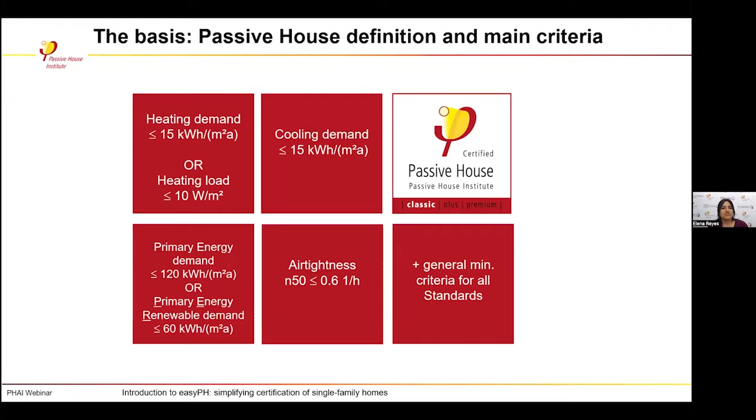So, the basis of everything that we do at PHI is the criteria that was set in the 1990s, and so the core definition has not changed. Whenever we talk about new approaches or new developments, we are actually thinking about two goals. The first one is to streamline certification, or in other words, make certification fast and easy. And the second one is to expand, to have more typologies designed and certified as Passive House.

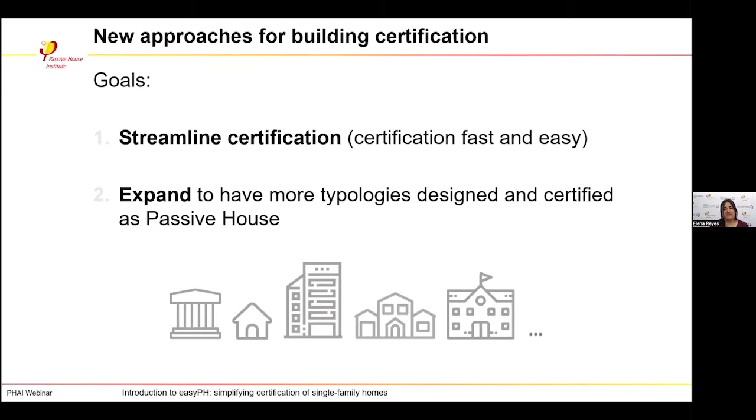That includes, for example, in later years, swimming pools, hospitals, and now we're talking about laboratories designed and certified as Passive House buildings. The topic of today is going back to the more common typology, which is single family homes, and it's called EasyPH, which is a tool based on PHPP. The hope and the aim is to make certification, and not only certification, but the planning of single family homes easier.

So the first part from my side is a few slides about the concept behind it and the general workflow that you need to use the tool. And the second part is the example that Shane will dive into so that you understand better, or take a closer look at the file itself.

So why focus on simplifying certification of single family homes? Well, as you probably already have experience with single family homes, we typically have smaller teams, so we also have smaller budgets. And at the same time, projects may be quite different one from another, right? So we have a lot of details that we have to check during certification, and this becomes challenging.

So even if teams are interested in building certification, that adds up to the budget and may become an important part of it. So the easier and the faster we can make the planning and the review, the more affordable we can make this option.

And let's not forget that in many places where we don't have passive houses yet, this is the first choice, right? People think, oh, I want to try passive house, I will start with a single family home. So the easier we make it for everyone, then the better and the faster we can have passive house all around the world. And then we have these projects which become exemplary projects and are the reference for other people to also do passive houses in these new regions or countries.

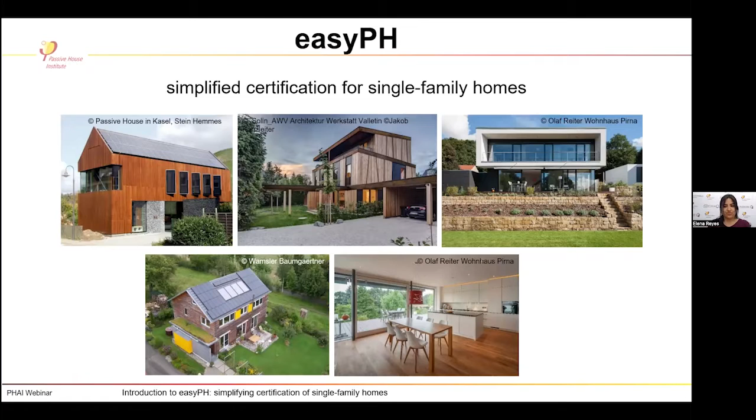So EasyPH is basically a modified version of PHPP, specifically the latest version of PHPP, which is 10.6. But we've managed to work on the assumptions that we need for single family homes so that we have simpler and way less inputs than we do in the normal PHPP. To give you an idea, instead of the 40 something worksheets that we have in the normal PHPP, we only need 8 input worksheets.

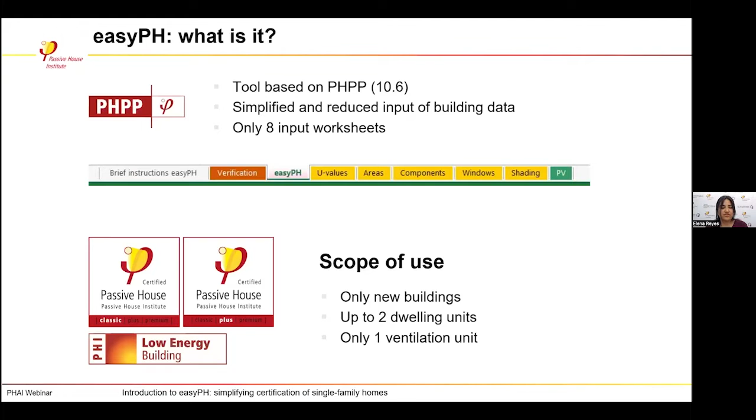The scope of the tool is at this first stage only for new builds, and you can actually calculate up to 2 dwelling units, but only if they share the same ventilation unit. So this is what the tool is aimed at at the moment, and we hope we can make some changes to, for example, also include retrofits, but we started with new buildings.

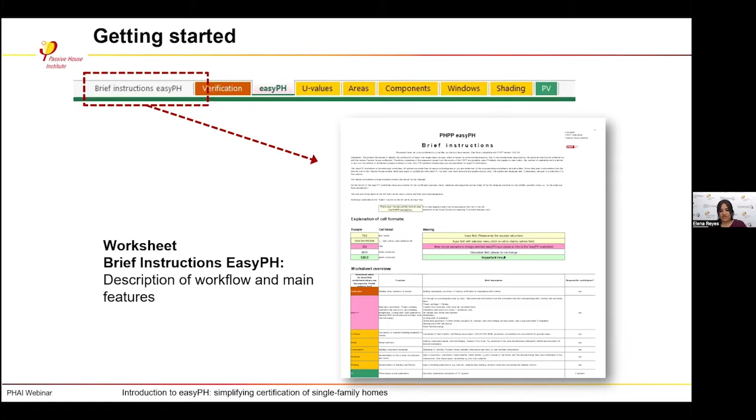So from these worksheets, we have, as we also do in PHPP, a worksheet called brief instructions. In this case, it's called brief instructions EasyPH, and that's just basically the best place that you can start with your calculation. It gives you an overview of the workflow, the different formats that we use in the worksheets, and then what information is expected from the project in each of the different worksheets.

EasyPH is also an additional worksheet here, and that becomes the main input worksheet. So that's where you have all the information that you need for the project, and then that information is linked to the original PHPP worksheets, which are actually in the background, but they're hidden because they cannot be changed in this case.

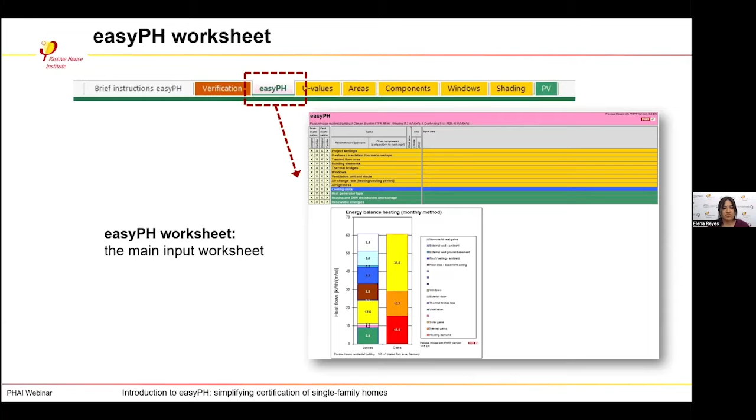As you will see with Shane afterwards, the EasyPH worksheet is structured in categories, and those categories are basically the ones we typically use for the planning and design of passive house projects. So based on the geometry, and then the ventilation systems, heating systems, and so on. So it should be, if you're familiar with PHPP, relatively easy for you to use EasyPH.

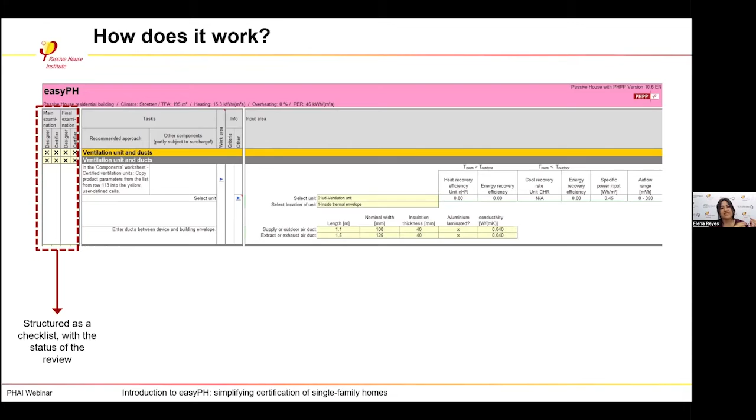So how does it work? If you look closer at the EasyPH worksheet, we start on the left with sort of a format that works as a checklist. This is intended so that the designer and the certifier have an easy overview of the status of the different categories and whether more information is needed, or if that category is complete and correct for certification. The next section is the description of the tasks.

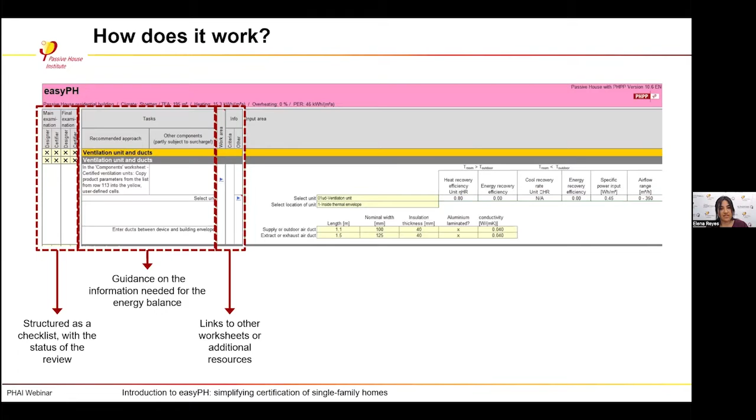So what is expected in this category, it's meant as guidance on the information you need to calculate the energy balance, and it's divided into two parts. One is the recommended approach, which will make planning and certification easier. There are other options given too, but these may need more time to carry out the model and for the certification review. Next, we have links either to worksheets still present in EasyPH, like windows or components, or to useful resources where you can get information needed to calculate the energy balance. The last section is the main one, where you input all the information about your project.

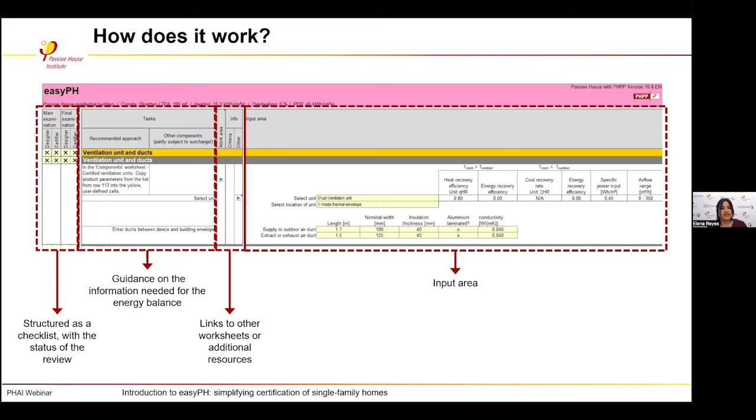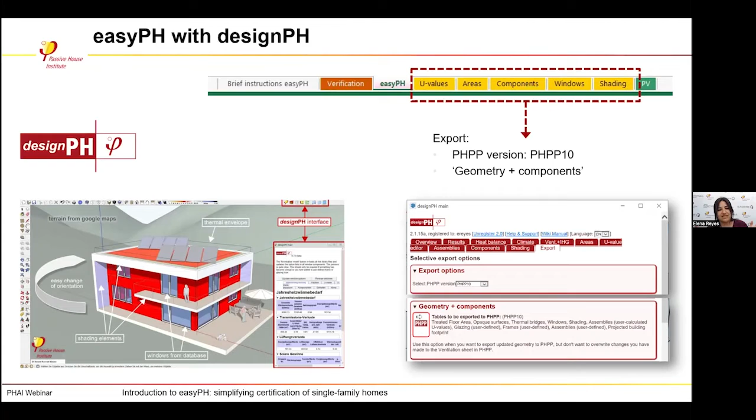EasyPH is also designed so you can use it with DesignPH. You can carry out your DesignPH model, enter all the information about your thermal envelope, and also calculate the shading. That, in my opinion, is the best approach, because it makes everything easier. If you use DesignPH, you've already completed 5 out of the 8 worksheets in EasyPH, and you're almost ready for certification. Just a small note: you have to export with the option geometry and components so that you don't overwrite any of the formulas on the hidden worksheets.

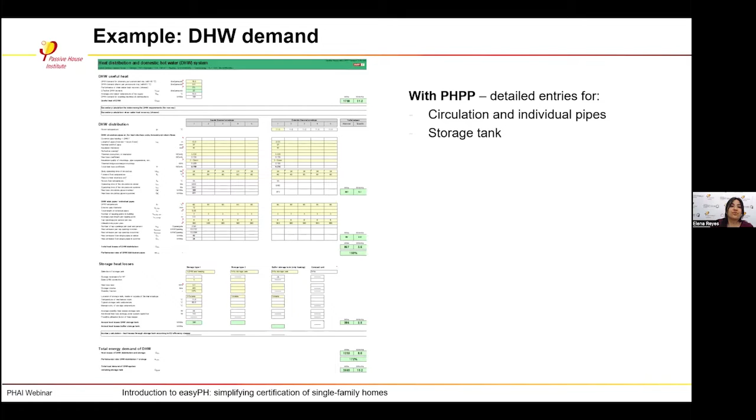To give you an example of the simplifications in the tool, I wanted to show the domestic hot water demand calculation. With PHPP you actually need a very detailed calculation, entering all the information from the circulation and individual pipes with exact measurements of all the different trajectories, plus detailed information about the storage tank. This is possible, but it's quite time consuming. So with EasyPH, we have very reduced entries for the pipes, just a few measurements here and there, and then we make an estimation of the losses based on the selected type of distribution.

If you say it's a compact distribution scheme, the assumptions are more positive, and if it's distributed throughout the whole house, the assumptions are a bit more negative. I think Shane will show you the example of the house he calculated for more clarity. Instead of having to submit all the different domestic hot water drawings with the measurements of each pipe and diameter, you just enter a few values, giving a general idea of how the system is distributed, not all the details.

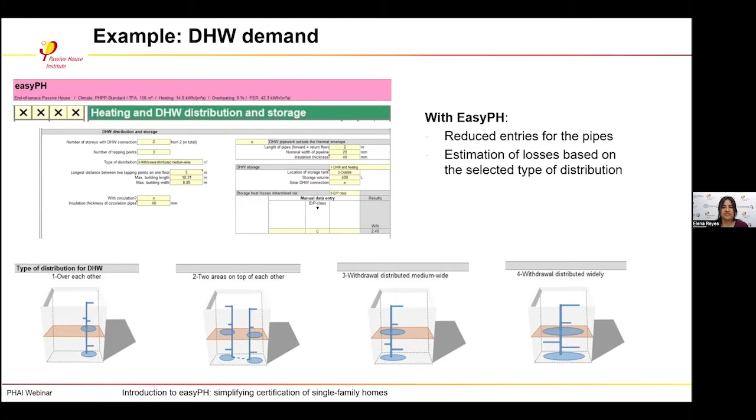In terms of guidance, I wanted to show an example for window installation situations. The recommended approach, which makes the calculation easier, is to start with inputting from DesignPH. Then for the actual values of the thermal bridges, you can either use similar installation situations from thermal bridge catalogs, or enter installation situations from component certificates if you're using certified components. What's implied here, though not an attribute of the tool itself, is that we start with good planning. The better our installation situations are, the more similar examples we can find in catalogs. If we have very specific details only for our house, it might be harder to find similar installation situations.

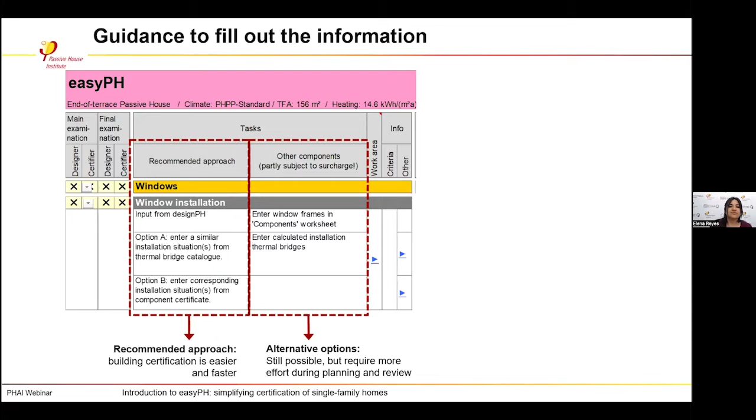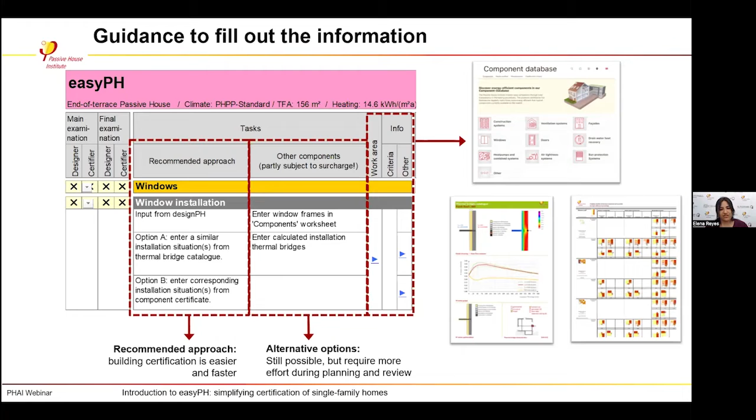Then we'd have to use the second option, calculating our own thermal bridges, which of course takes more time, both for the designer to get the values and for the certifier to review the project. In terms of the resources or links we include in this category, we have the link to the components worksheet so you can enter values, but also links to the component database where you can find examples of certified components, and other catalogs PHI has made available, covering different installation situations for building assemblies using concrete or wood. We hope these examples cover a large portion of typical installation situations, so you don't have to calculate thermal bridges for your specific project.

And then, of course, we still have the verification worksheet. The difference between the normal PHPP and EasyPH are these pink cells that you will see throughout the different worksheets. Those are the cells that are linked to the EasyPH worksheet, or that are fixed and cannot be changed, but same criteria, same verification method with specific values, everything again in the verification worksheet.

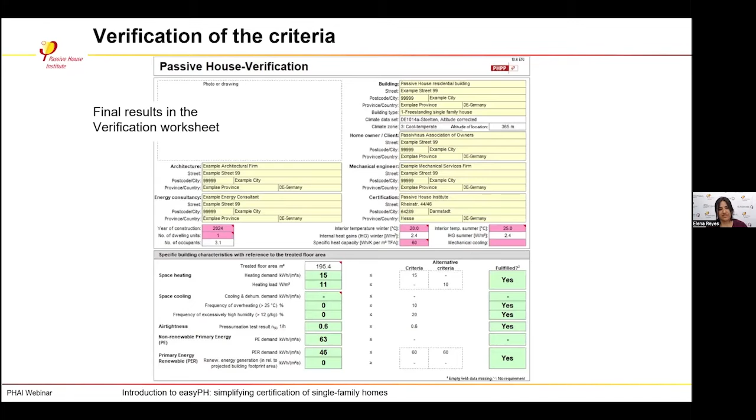So hopefully we have piqued your interest and you're wondering, how do you get EasyPH? EasyPH has been released together with PHPP 10.6, which was sent out to PHPP users in April this year. We've released this as a first step, as a beta version, but you can already use it for certification. All you have to do is notify your certifier that you want to use EasyPH. And please send us your feedback and comments so we can continue to improve the tool.

In case you want to share this information, there is a small, quick description of what EasyPH is on our website. You find it under PHPP, and then EasyPH. And in case you're curious about other developments from PHI in terms of building certification, I also invite you to go to our site where we have the energy standards and criteria. At the bottom, we have a section called Criteria Under Development, where we describe a few new approaches that we are testing. If you're interested, just contact us or an accredited building certifier for more information.

And with that, I would let Shane show you how the tool works and how he filled it out for the project that he used as an example.

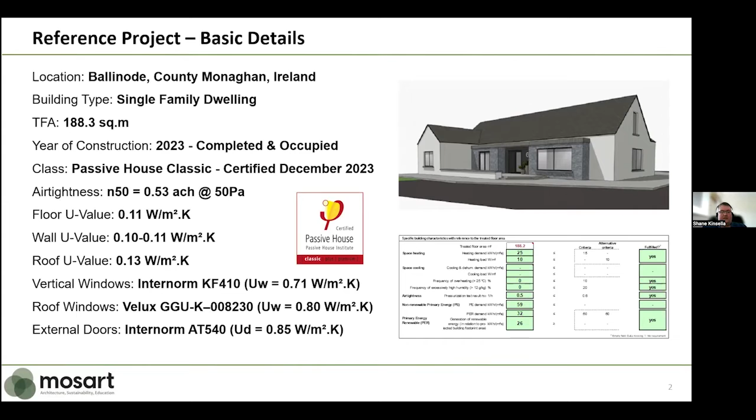So that's the house we'll be using as our reference dwelling. I've just set out briefly here some of the key characteristics of the house. The house achieved an N50 of 0.53 air changes per hour. We have U values in the range of 0.1 to 0.13. All the vertical windows and external doors were provided by Internorm - alu-clad windows with triple glazed units throughout. So the design is quite good on that front, and you can see the U values are pretty decent. We also have some Velux roof windows in the rear of the house - I think they have 5 panes of glass, a triple glazed unit with an outer double glazed unit on top of that. So it's quite a hefty unit, a certified system from Velux, which gives a really good performance.

So that's the key stuff. On the ventilation side, there's a Renson MVHR system installed. Flow rates were calculated both in accordance with TGD Part F, the regulation for Ireland, as well as Passive House, and it was found that the TGD Part F values were a little bit higher than Passive House. So that was the basis of the design.

The MVHR system had an efficiency of 84%, and when we calculated it in PHPP, including the fresh air and exhaust ducts, it actually came back at 82.3% effective heat recovery. You can just barely see in the first picture that the exit point for the fresh air and exhaust is very, very short, and you can see the detail where those ducts went out through the external wall of the house. Barry had placed it very close to the external wall, so that run was minimized, hence the effective heat recovery was very high.

We would sometimes see that value a lot lower. So the electrical efficiency of the system is given there, and it was a 160 millimeter EPS duct system that had a 16 mil wall at 0.03 on thermal conductivity. Then within the dwelling, there was a radial system to distribute supply and take back the extract back to the unit. So that's the ventilation approach.

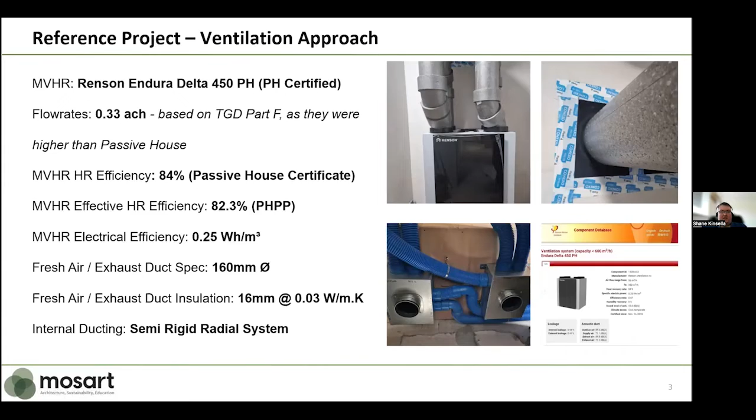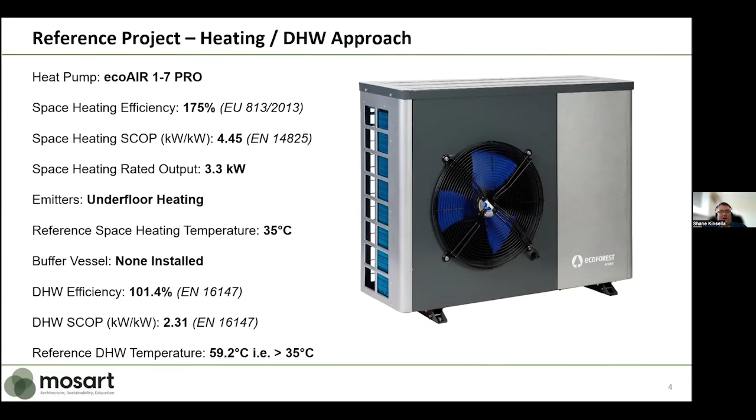Then on the heating front, Barry installed an EcoAir air-to-water heat pump. I provided some values here from the performance of that heat pump on screen. You can see it has a pretty decent SCOP when it's doing space heating, that's at 35 degrees, as there is underfloor heating throughout the house. We can also see that domestic hot water efficiency is pretty decent there, with a 2.31 on the SCOP for generating domestic hot water. So overall, the heat pump was a nice fit for the house. It delivers 3.3 kilowatts of space heating, which is more than enough for the house. The house had a load of approximately 2 kilowatts, so it was a nice size, and I think Barry has expressed that he's quite happy with the performance of it to date.

We also had a dual domestic hot water cylinder, a 500-litre cylinder. That might seem quite a large cylinder for a dwelling, but bearing in mind a family with lots of hot water demand in the house, 500 litres is often justified. So that's a dual 500-litre cylinder, and the heat loss was given from that provided by Joule, and that tank has an energy label rated as C.

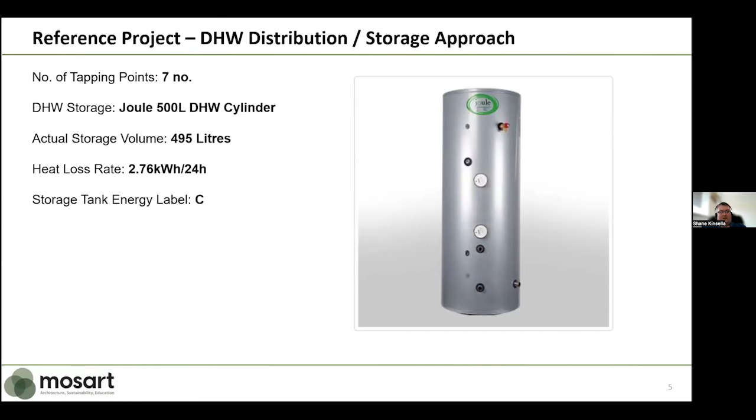So those are the basic details that we used in our inputs into the EasyPH. I'll move on to the EasyPH now. We'll take a quick look through it, and bearing in mind today time is limited, so I'll try to keep the presentation as short as possible. We won't be going into massive detail here, but as Caroline said, there'll be further webinars on individual sections.

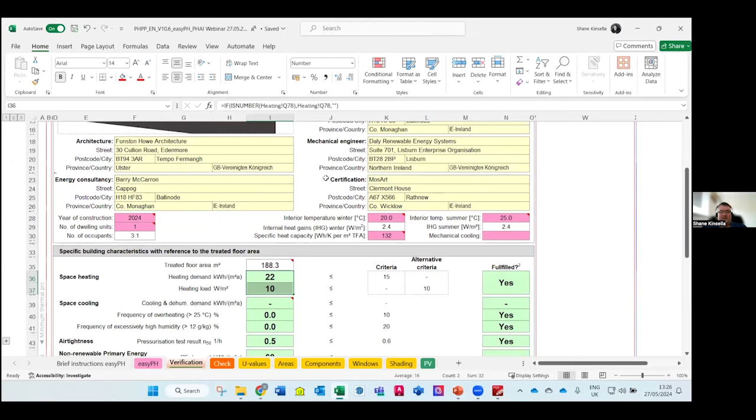So we can see here that the house, when modelled in EasyPH, would actually comply with Passive House Classic. We can see it's hitting the 10 watts per meter squared there, which, when we go to decimal points, is a little bit more conservative using EasyPH, in the order of about 0.3 watts per meter squared. So there's a very small penalty built in there, which I think is fair for the reduced paperwork burden. The house would still be fully certifiable.

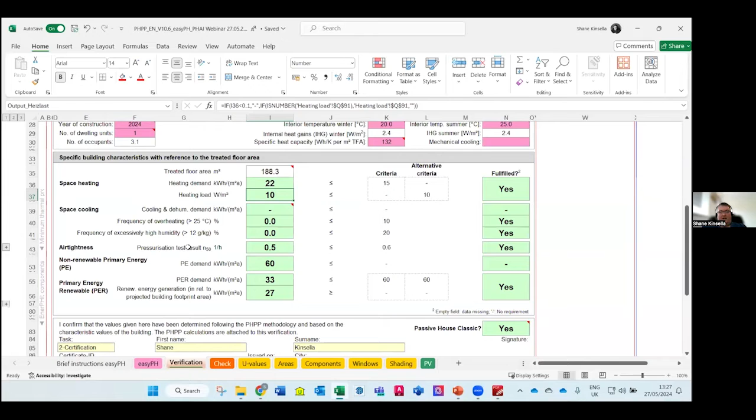So that's the verification tab. As Elena said, there are 8 tabs fundamentally in EasyPH that we need to fill out. Within the brief description tab, there's plenty of information about what we must provide, like in the verification tab - building description, summary results, etc. Nothing really unusual there. Within the EasyPH tab, the vast majority of the design information, particularly on the MEP side - ventilation, heating, domestic hot water, cooling, anything like that - nearly all goes in on the EasyPH page.

Within your other tabs, your U values are very same as traditional PHPP modeling - you put in your build-ups, correction factors, all that good stuff goes in there. Nothing unusual there for most PHPP practitioners. On the areas tab, again, very similar to what you'll see in a standard PHPP - your areas will all come in, your thermal bridges, all that good stuff. The calculation of treated floor area is done in the EasyPH tab, so we'll take a quick look at that now. That's probably the big difference.

A lot of people will calculate their TFAs in DesignPH, but your DesignPH must be based on geometry and components only. You don't pull anything else out from DesignPH. Your treated floor area must be calculated in PHPP instead, and there's a good reason for that. We'll take a quick look at that in a moment.

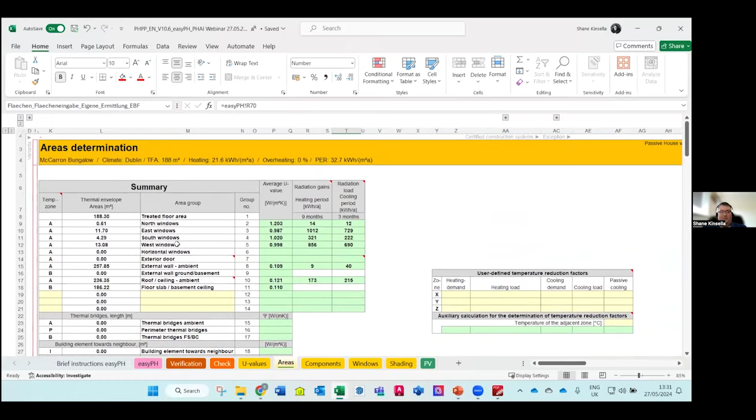Same on the areas tab - it should be familiar to most people. The summary up the top will be pretty familiar to most practitioners. Again, you'll see nothing terribly different here. Probably the one thing you've got to do is cross-link your TFA across from your PHPP tab. All you simply do is put an equals in and cross-link it to that output, or you can type it in manually. I would tend to cross-link it, but manual input is fine as well.

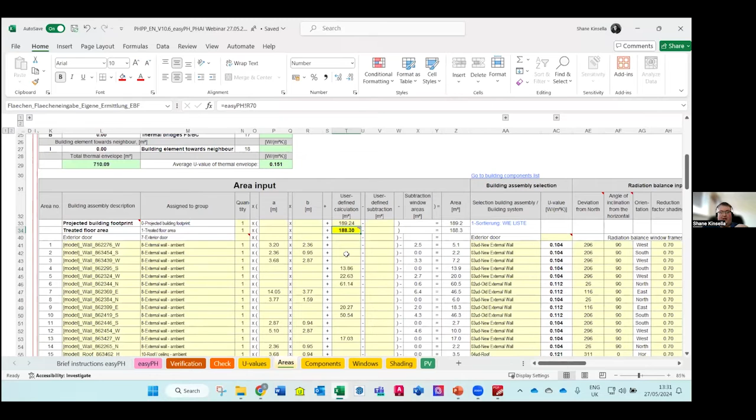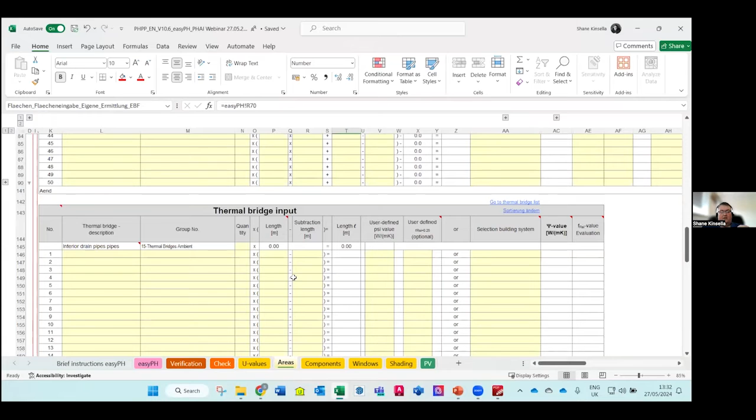The areas tab again is all fairly standard, nothing really out of the ordinary there. Thermal bridge tab, where relevant, you fill that out. If you're not doing a thermal bridge free design, you'll put in your thermal bridges, all that. So nothing really unfamiliar there.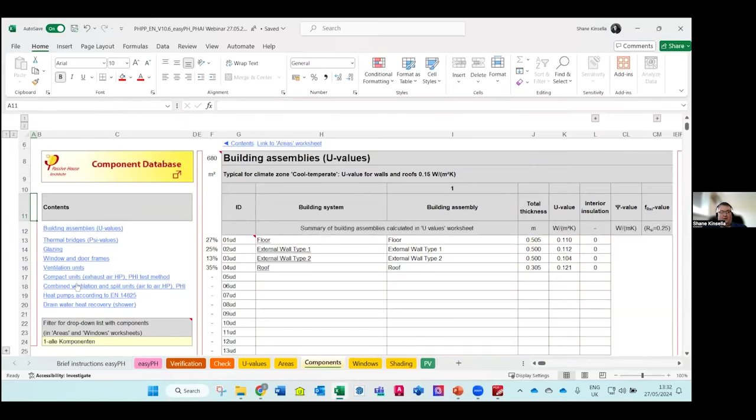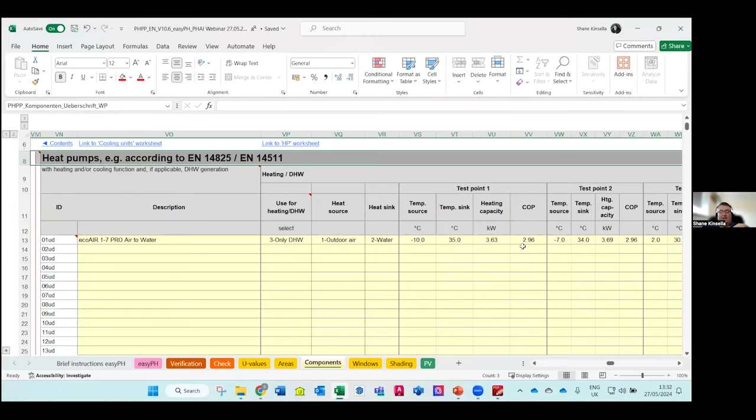Again, when we go to the components tab, it will all seem fairly familiar to most practitioners. You put your glazing types in, your window frame types in, all that good stuff goes in. We can then put in our heat pump inputs if we're doing a detailed heat pump calculation. There is a simplified approach, which I'll show you, which will cover most projects, but where you want a more detailed result, or maybe you're struggling a little on the PER, you can look at the detailed approach. It should again be relatively familiar to most people.

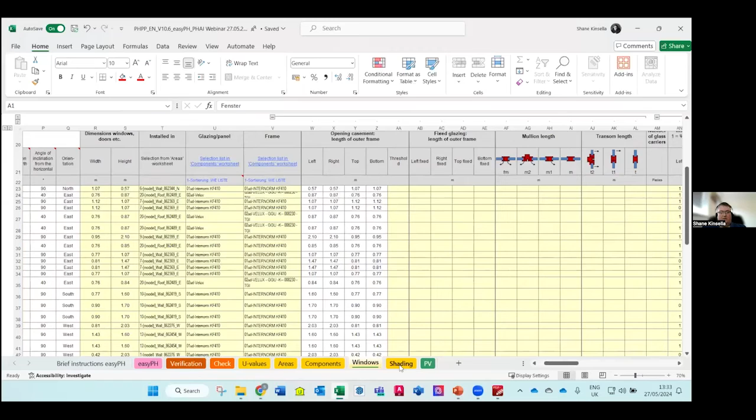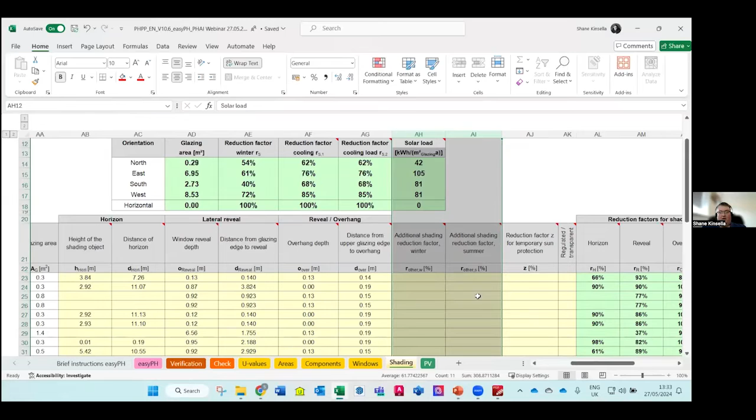Windows and shading is all fairly standard. You put in your window frame details - most of it will come from DesignPH. Where you've transoms, mullions, etc., you can pull all that information in, assign all your installation thermal bridges, etc. Again, all fairly standard stuff. Same with shading - in this case the shading was calculated manually for this project, but where you have a DesignPH model, these tabs will be automatically filled in for your reduction factors. So again, it should all feel fairly native for most practitioners.

And last but not least is our PV tab - again, same as a standard PHPP. You put in all your information from your data sheets, etc.

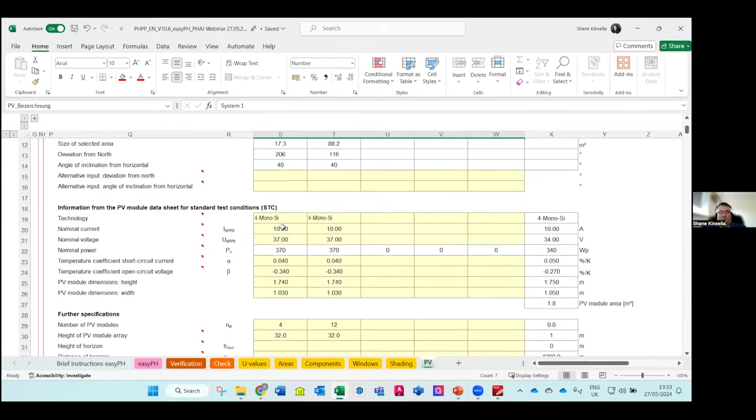Put in how many modules you have, all that good stuff. Put in the efficiency of your inverter, etc. And then PHPP will do the rest and calculate how much electricity the PV is generating, and then work out any PER allowances, or if you're working towards plus.

You can certify to plus in EasyPH. It's important to note you cannot certify to premium. If you're deciding to go passive house premium, it's not possible, certainly at this time, to certify a passive house premium dwelling using the EasyPH approach. You must go the full PHPP road. So anyone advising clients, just be aware of that. For classic or plus, very easy. Premium, not happening. It's not currently on the table.

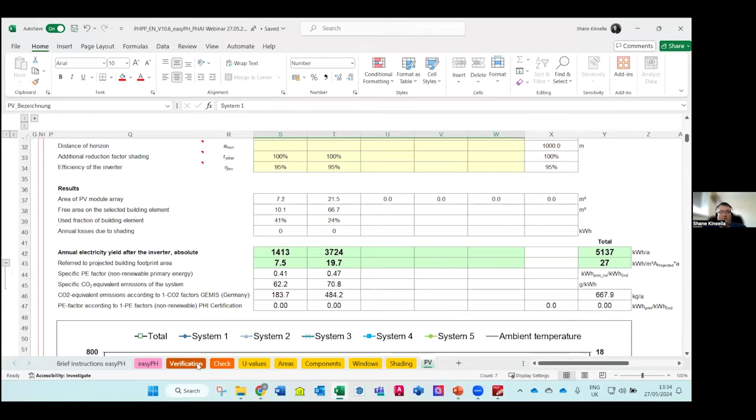So that's, I suppose, the key tabs that have to be filled out. I think most people will find they're all fairly intuitive for most practitioners. Again, your verification tab will seem fairly native for most people. There's a set of tabs on the right hand side that are typically filled out in a traditional PHPP. They're actually hidden away here — you don't need to fill those out. They're all done on the EasyPH page.

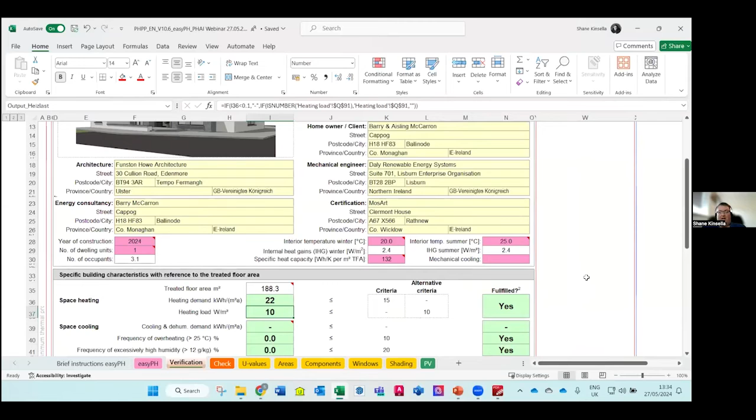So that's just a very brief overview of the inputs. When we get into the EasyPH page, we start at the top and work down through the various sections. As Elaine said, there are various sections — one where the designer and certifier can tick off work as it's completed and accepted by the certifier, and those little X's get filled out. That's a very simple approach. There's a recommended approach and an alternative approach listed in the tasks, nothing too complicated — most people can read it and just work through it.

So we fill out our first tab, which is project settings. We fill out the key bits — we're going for passive house. We can certify a passive house or PHI low energy building at the moment. It's not currently used for EnerPHit — that's not on the agenda. We can also certify for classic or plus, but we can't certify for premium.

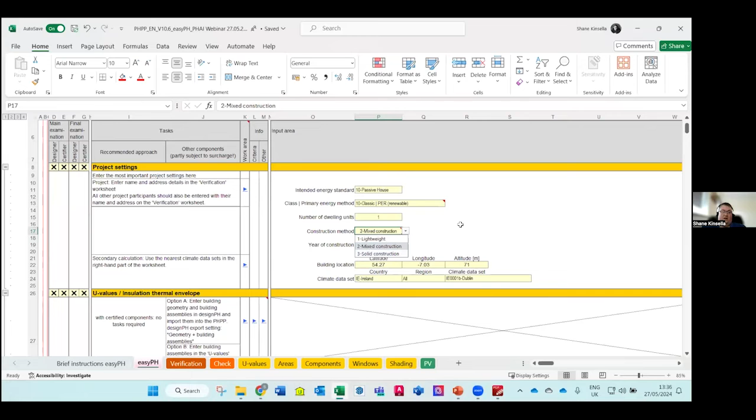We can put the number of dwelling units in as 1 or 2. We can put the construction type here, which is used for calculating your thermal mass — lightweight, mixed, or solid. In this case it's mixed because we have a mixture of timber and concrete.

The year of construction can be entered. You can also enter your building location and altitude, etc. Pick your weather file — it's important to note the weather file must be a PHI approved weather file in the main PHI directory. If you're using non-standard weather files, you can't use EasyPH; that's not permitted. There's also a secondary calculation to the side when you put your location in that allows you to pick alternative weather files and optimize which one might be suitable for your location. In this case, we've used Dublin, the original weather file used for certifying the building, so we've stuck with Dublin for this example.

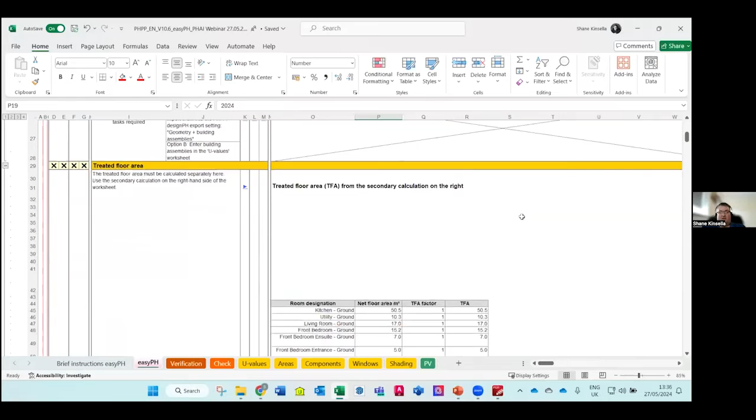But then we get into TFA and — sorry, I missed the U-value section here. The U-value section is calculated as normal in the U-values tab, and that pulls that information in automatically. So there's nothing to fill out here, no inputs needed at this point — it's all done from your U-value tab.

So then you get into the TFA tab. This tab is a requirement that must be filled out. We must enter the information here, and this will calculate both the TFA, Vn50, and the ventilation calculations all in one sweep. We can put the number of floors — ground, first, second, whatever — however many floors are in the house. There is no TFA limit and no limit on the number of floors that can be certified using EasyPH. The criteria is based on number of dwellings and ventilation systems — you can only have one ventilation system.

So you could conceivably have a 4-story, 5-story dwelling, perfectly fine, no issue. If it is a single ventilation system, it can be certified with EasyPH.

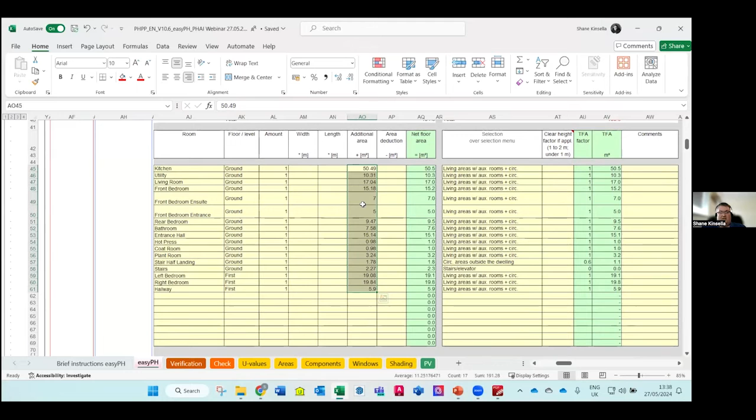Within this, we've itemized all the room areas here. So we've put in all the areas of the room, excluding internal walls etc., following the standard PHPP measurement approach as per the manual. We can then assign the rooms from the drop down list, and put in whatever type of spaces we're working with.

Most areas will be living areas. You can put in your stairs or elevators, etc. Any circulation areas outside the dwelling, or half landings or stuff like that, can go in as well. The tool will do everything else automatically for you once you itemize that in.

We can then work out our VN50. We put in our average room height. I've been a little creative here in that I've just taken 2.7 as a standard value. In reality the values are a little different in this house, but for the purposes of the example, I've just assumed all floor to ceiling heights are 2.7.

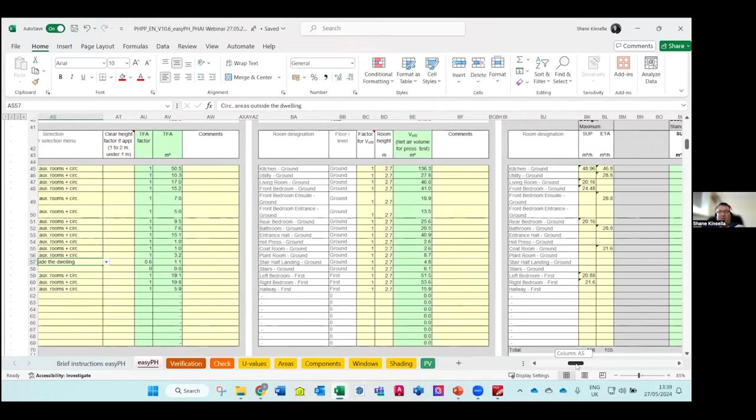Then we can go into the ventilation section and calculate our ventilation flow rates. It will allow us to put in the values in meters cubed per hour. You'll see I've converted some of these from liters per second, since the building was designed on liters per second, so I've just put some formulae in. That's perfectly fine to do - you multiply your liters per second by 3.6 to convert them to meters cubed per hour.

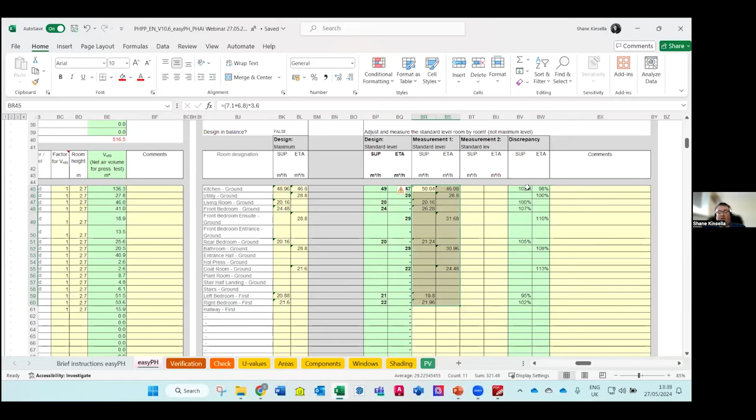We can then put in the commissioned information in this section, plugging all those values in, and PHPP will automatically calculate any discrepancies. Normal rules apply - plus or minus 10%. The fresh air and exhaust must not be outside of that range. We can put in our final measured values at our outside grills, following the normal rules in the Passive House criteria.

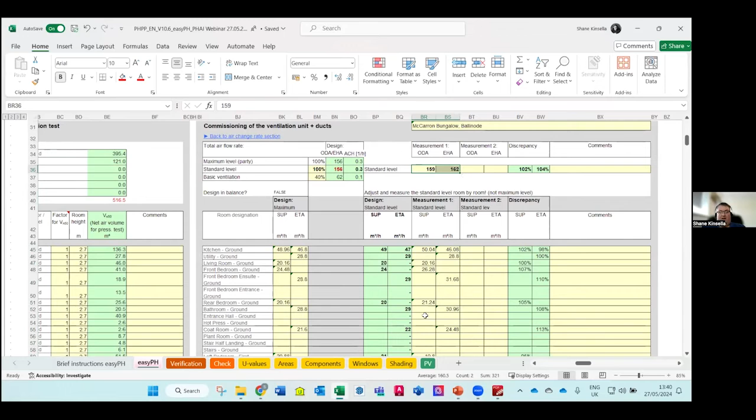So ideally measured at the grill. If not, it can be calculated on board. And if that doesn't work, then you can add the various values together, but ideally measured at the outer grill is preferred. So all that good stuff is done.

There's a little section down the bottom here for putting in some of your commissioning information. Your commissioning guys can sign off their bit within the Excel file, and that closes that bit of it out. That gives you essentially all the inputs needed to do your EasyPH calculation.

I'm not going to dwell too much on the next few tabs because it's literally all been done previously - your building elements, your areas, thermal bridges, windows, all that information is picked up in the other tabs. Once you've filled those out, you're good to go and ready to start putting in the ventilation systems into the house.

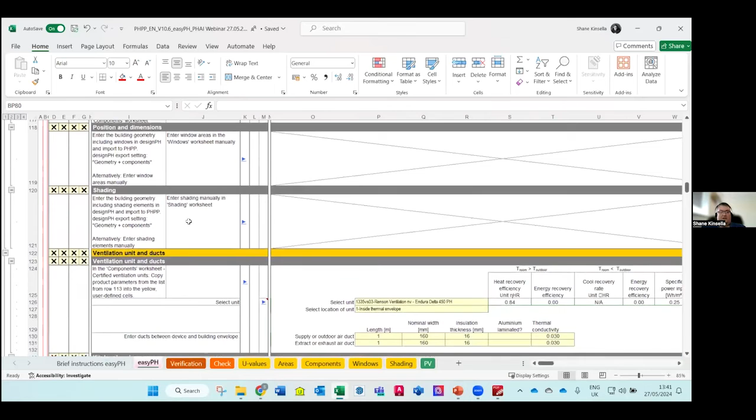So we go down to the ventilation section, and we actually find it very simple to fill out. You literally have two main tabs here that need filling out. From the list here, we can select a certified ventilation system, or a ventilation system we filled out into our components tab - anything in the components tab will be available here too, which will be familiar to most practitioners. In this case, we had a Renson Endura 450, which is what Barry put into the house.

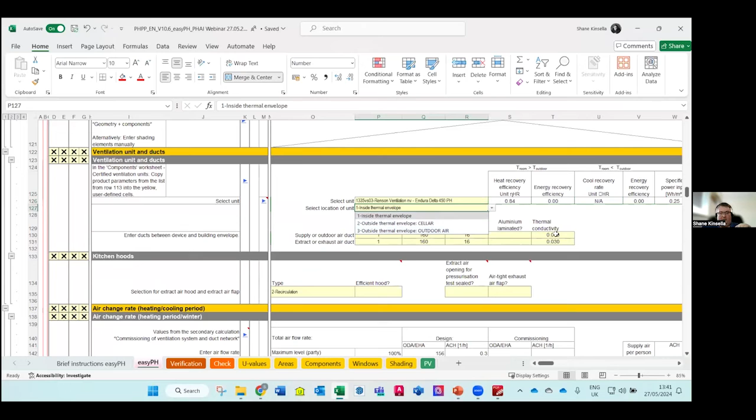So that's within the thermal envelope. We can select whether it's in the thermal envelope, outside the thermal envelope in a cellar or basement, or outside the thermal envelope in something like a shed - which ideally we shouldn't be doing, but sometimes there's no alternative. So you have 3 options there, and you just select the relevant one.

For our fresh air and outdoor ducts, we put in the length of the ducts, the diameter, insulation thickness, and then we can select an X if they have a foil back coating or an aluminium coating on them, as we've seen from the photographs further back. There's no aluminium coating in this case, so therefore we leave that box unchecked and input the thermal conductivity, which you get from your data sheet for your insulation. So that's basically your ventilation system entered.

There's nothing else to do now on that bar, just put those few pieces of information in, which I think is fair to say is very easy.

So the second thing we look at is the kitchen hoods. I suppose, as most designers here are aware, we try to put recirculation hoods in. I know in some cases there's regulatory requirements or client requirements that insist on ducted ventilation systems, and there's the possibility of entering those here. So we can select from the drop down if it's an exhaust air hood or if there's none at all, which is unusual, but most cases it's recirculation.

If there is an exhaust air hood, we can begin to fill out these other sections. The efficient hood box will apply for recirculation or exhaust air, so if it meets the criteria for an efficient hood in the exhaust air guidance document, you can tick that box. If not, you just leave it unchecked.

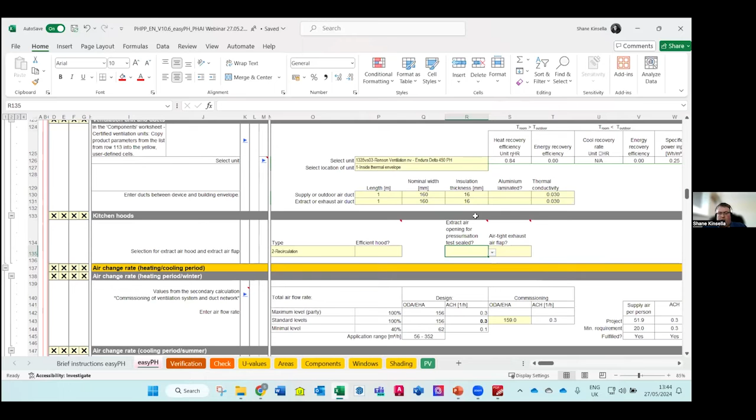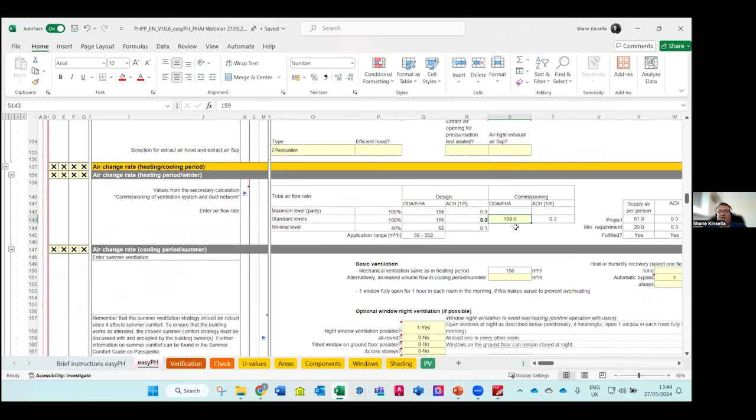It should be straightforward, I think, on that front for most practitioners. The final thing we have to put in our air change rate section is our final commissioned value. So the average of our fresh air and exhaust value gets entered into this box, and that will then calculate out the overall air change rate.

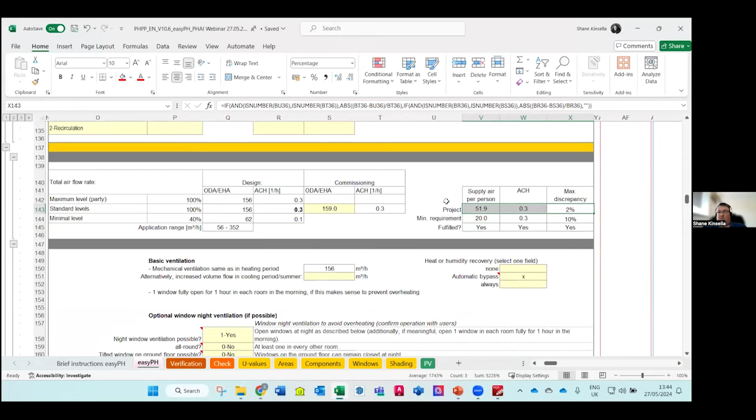There's a little tool on the right hand side that will confirm all the criteria as set out in the passive house criteria are met, based on supply air per person, overall air change rate, and then the discrepancy. So in this case, we can see we're well covered by the criteria - all criteria fulfilled. Essentially nothing to see on that front for most projects.

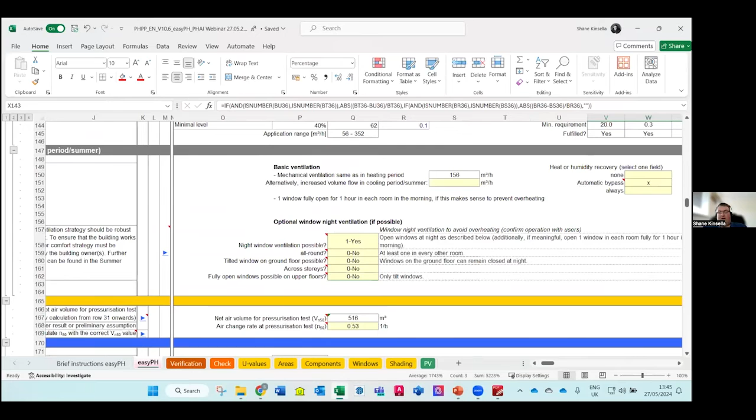We can then begin to load in our air change rate for summer cooling. There's the facility here to input various values. So we can put in, if we have a bypass system, which we should have for all passive house buildings, we can select that on, and then put in an increased flow rate if that's the case. If the ventilation system runs at a very high rate in summertime, that can be put in here to get the benefit of the cooling.

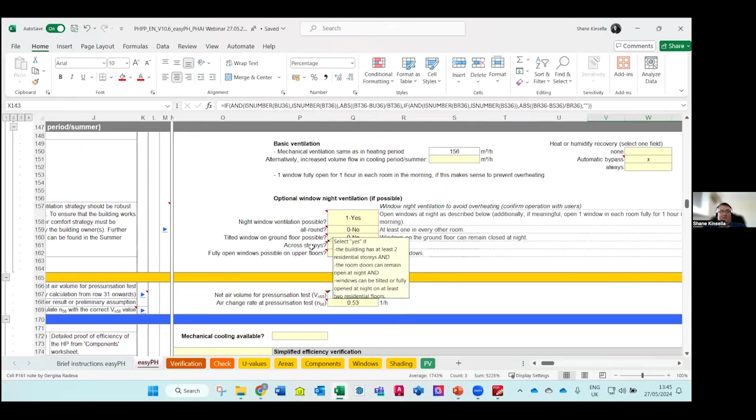There are some inputs down the bottom for things like night ventilation and various other things, with notes beside them all. Again, if the scenario applies, you tick them on; if the scenario doesn't apply, you select no and leave it at that. Then PHPP will do the rest from there - you don't need to provide any further evidence except maybe floor plans, etc. So that's that end of it.

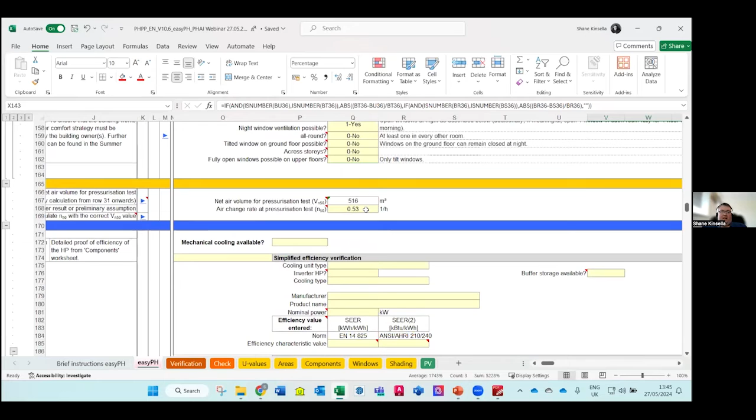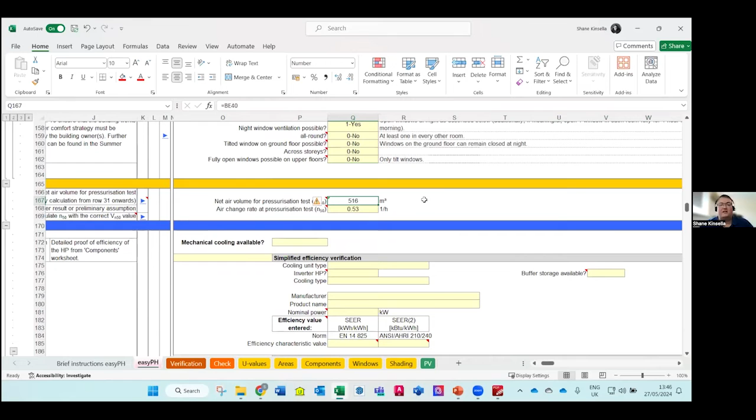We will then put in our air change rate from our pressurization test, whatever comes back in air changes per hour. It's vital that we check the VN50 in the pressurization test is accurate. If that value is not accurate, we'll need to use an auxiliary calculation provided in the EasyPH tool. I actually noticed a little error in that - I'll talk to you afterwards. It's actually calculating the wrong way around, the two values were in the wrong order, but I've corrected it there. It's a very handy tool that allows us to convert from the actual tested value and get an accurate input for our PHPP.

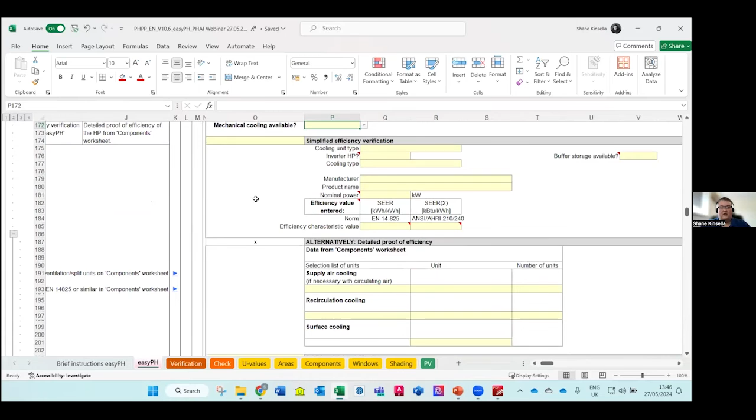So if we have cooling, we have a section here we can put cooling in. If there is mechanical cooling within the dwelling, we can select the X here and fill out a simplified or detailed efficiency. I'm not going to go into any detail today - it's not really used all that much in Ireland, mechanical cooling, and even in the UK it's rare as well. I know many of our international projects would have mechanical cooling, but we'll go through that another day. I'm going to focus more on heating today since time is ticking away, so I don't want to delay too much longer.

We've two approaches here for entering our heating: a simplified and a detailed approach. We assign our heat generator type - this will be familiar to anyone who knows the PER sheet. We can fill that section out, and then go down and calculate the efficiency of our heat pump.

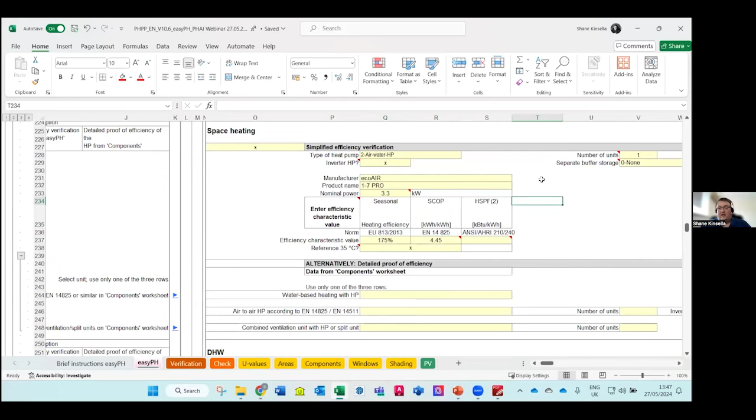The simplified approach is very easy. We simply enter the nominal power of the heat pump, and we can enter either the seasonal performance of the heat pump or the SCOP. We can get that information from various sources - the manufacturer, eco design data, all those various places. If that data is based on 35 degrees, we must select the X in the box here. If it's based on 55 degrees, we don't select the X, and PHPP will do the rest.

We can do a detailed calculation, which we'll cover in another webinar, and that will tend to give more favorable values, but it requires more information. For most projects, the simplified approach should get them over the line. If you're struggling with that, you can take a look at the detailed approach. To be honest, it's not that much information needed for it, but in some cases you could be struggling to get that data.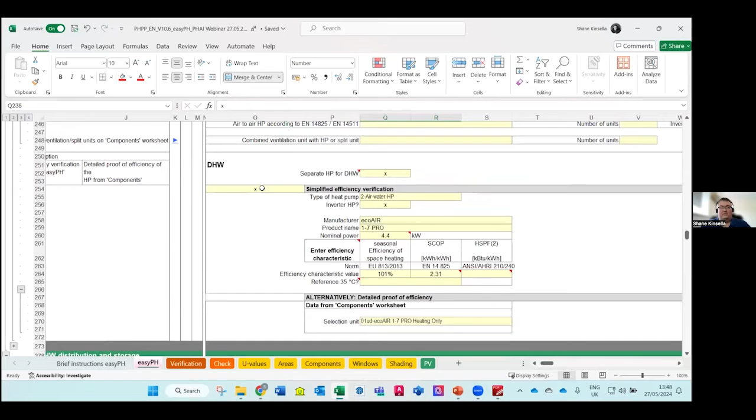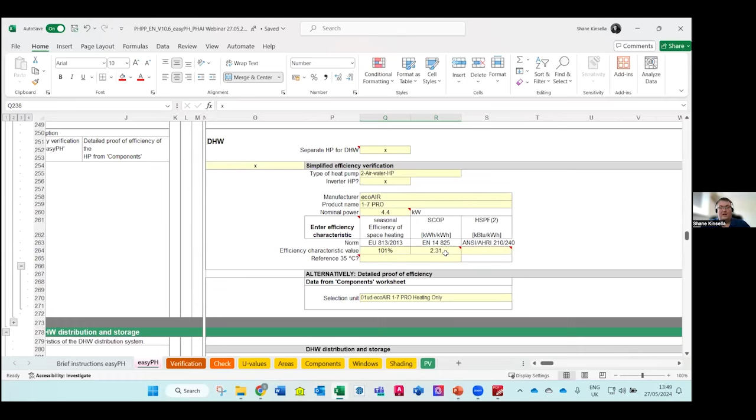Again, when we go to domestic hot water, we have a simplified or a detailed approach, and we can put in our heat pump details here - whether it's an inverter heat pump or variable speed, as the case arises. We can put in our make, model, nominal power, same kind of information. We're able to input the performance of the heat pump there, and we shouldn't be using 35-degree data for domestic hot water generation. We should be using 55 as a minimum, or preferably more detailed domestic hot water information, like we see from EN 16147, which gives us some further, more accurate information.

But if we don't have that, we can use the 55-degree data to generate those values. So that's how you put your heat pumps in - all very simple, very little data required, minimum amount of messing or tricking to be done with it. Very, very easy. This is probably the biggest reduction in workload, on the domestic hot water front. This has shaved off the amount of work to a fraction.

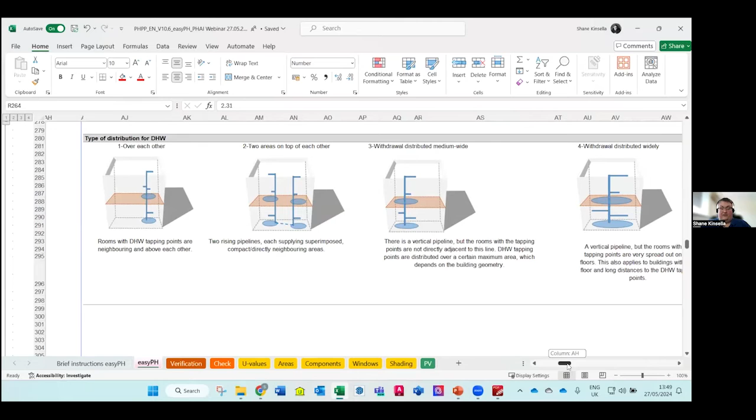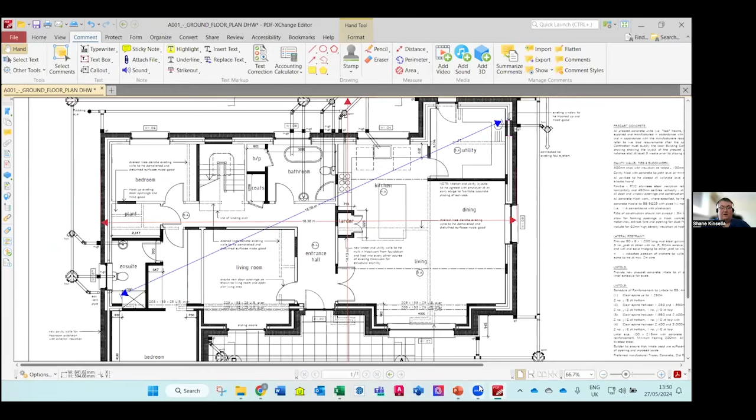What we have here is we can select the number of stories, we can select the number of tapping points, and then we have four options on the right hand side for how our domestic hot water is distributed through our building. We can select one of the relevant types from that, and put in some further information. There is some information that has to go in here if you have a type 3 or type 4 system. I've a very brief example here just to show the distance between the farthest tapping points, and then you measure the width and depth of the building from your external dimensions, and you plug all those values back into your PHPP, and that will work it out itself.

For domestic hot water storage, we can take either the calculated heat loss rate, or we can use the ERP value from the label - select if the label is A, B, C, D, whatever, and just plug that value in. If we have the more detailed stuff in the heat loss rate, we can do that as well. There are some more crude values there that we can use. There's an automatic one which gives you a crazy high amount of heat loss from the cylinder - I wouldn't advise using that unless there's no alternative. Alternatively, we can put the insulation thickness in if we know that as a starting point - let's say 50 millimeters of insulation - and that will give us at least a calculation to keep us moving.

Finally, then we put in our emitter type. It's very simple - you just select the closest type here, whether it's supply air heating, radiators, or underfloor heating. In this case, it was underfloor heating, so that's what's selected.

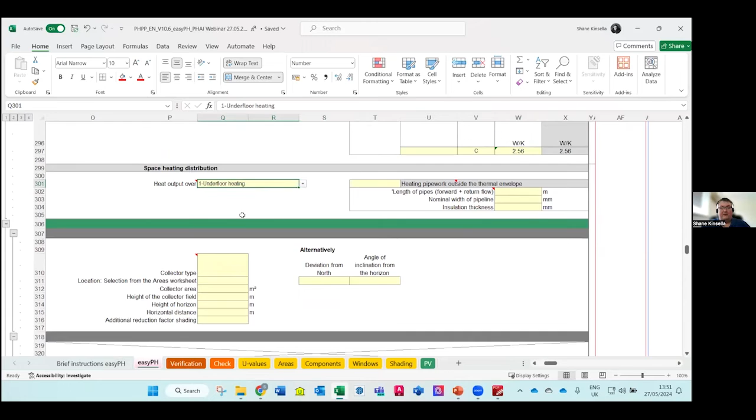And there are sections there if you have pipes outside the thermal envelope. We should be tending to avoid those, but sometimes it can't be avoided, so you can enter those there.

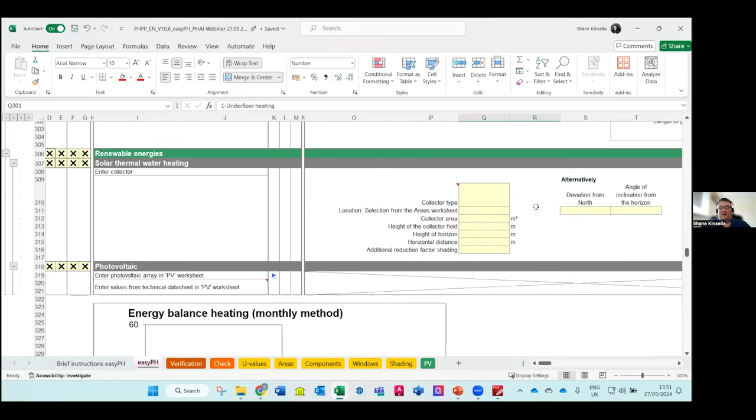And last but not least, we have our PV section, which pulls from our PV tab, and that will pull any information from that where relevant. And if we have solar thermal, there is a section here to fill out the solar thermal as well, and that will fill out all that section for us.

And that will then bring us back to our verification tab. And if we have our 5 yeses in all of these tabs at the end of our design process, and we're showing that our overheating, we're happy with that, then the building would be ready to go forward for certification.